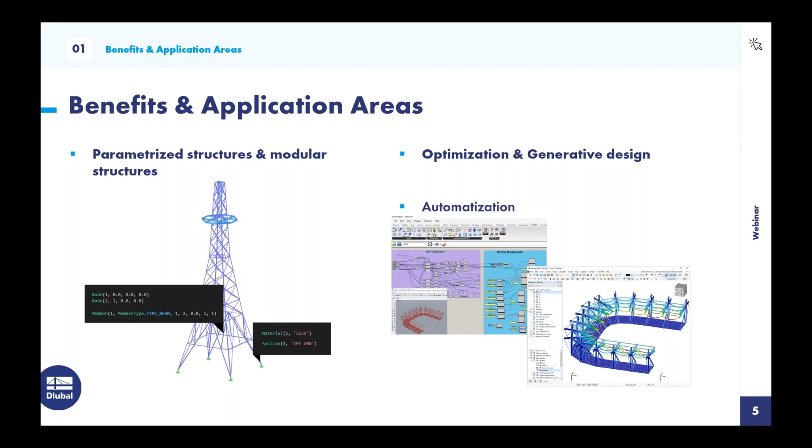The most fun part is the ability to communicate between a wide range of software. Beyond that, one can create their own applications or own plugins on top of RFEM 6. There will be examples showing how to make that happen.

So what is an API? API stands for Application Programming Interface. It is basically a messenger. It takes requests, translates, and returns responses. It is a communication protocol between multiple software or services to interact with each other. To understand the concept better, here is an example. A graphical user interface is the communication protocol between humans and software programs. Most of you are using the RFEM interface and give the program commands with the help of buttons or inputs. Well, in our case, API has the same function between one software and another software.

What are web services? Actually, web services are a form of API, and the distinction lies in style and the way of communication. Web services are XML-based information exchange systems. In our case, we are using an HTTP technology called SOAP, which stands for Simple Object Access Protocol, to make this connection happen. To use this connection in structural analysis and design, frameworks prepared by our team serve very basic functions, which enable the user to give RFEM commands and get responses.

So what's the difference between COM and web services, and why have we changed our technology? Well, RFEM 5 is a native Windows application. It only runs on the Windows operating system. RFEM 6 is platform-independent software which is compiled on Windows, Mac OS, and Linux. COM technology was a Windows feature which runs on Windows only.

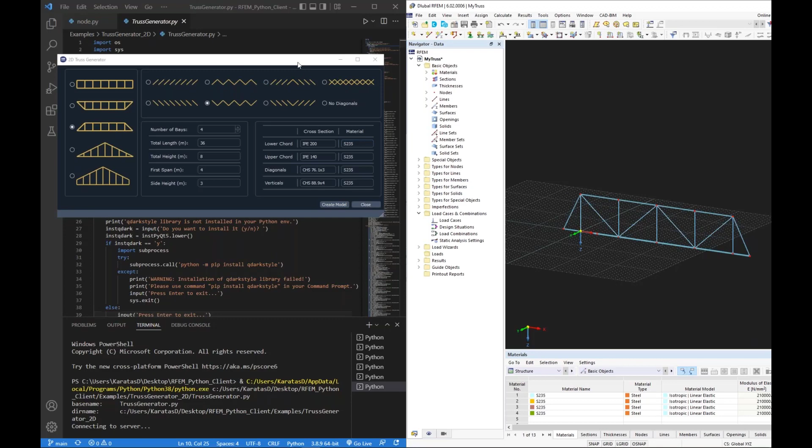I can edit the geometry inputs here. Let's say 8. I'll click Create Model again. And there's a new connection, and the truss is created. Yeah, it's a cool example, I think, and I'm going to show you some other examples. Let me open my new folder. I have prepared some examples for the webinar.

Here I have a tank creator example, which is a console application. It takes 3 inputs for creating a steel tank. These inputs are the diameter of the steel tank, height of the tank wall, and height of the arc. If I run this file, there will be a new model named steel tank, and there will be some inputs in the terminal for the parameters.

Okay, my model is created, steel tank, and my terminal is asking me the diameter of the steel tank. Let's say it's 12. The height of the tank wall, let's say 6. And height of the arc is 2. I'm clicking enter, and objects are updating in RFEM now. And my tank is created.

If you would like to edit this script for your needs, feel free to do that and create your own console applications or own graphical user interface. It's that easy. Okay, now I would like to create an example from scratch, and I will be coding this and explaining every line step by step.

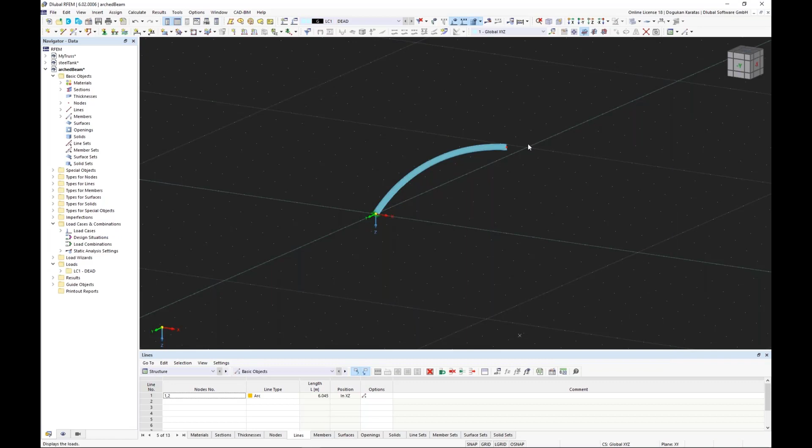Okay, let me make it full screen, and you can see our load case has created, named DEAD. Also, we have the static analysis named linear and self-weight consideration here 001. Okay, and you can see the loading by clicking this. You can see this is projected set. And of course, since we have calculated, the results are already ready. You can click the results and you can see the results here in the model.

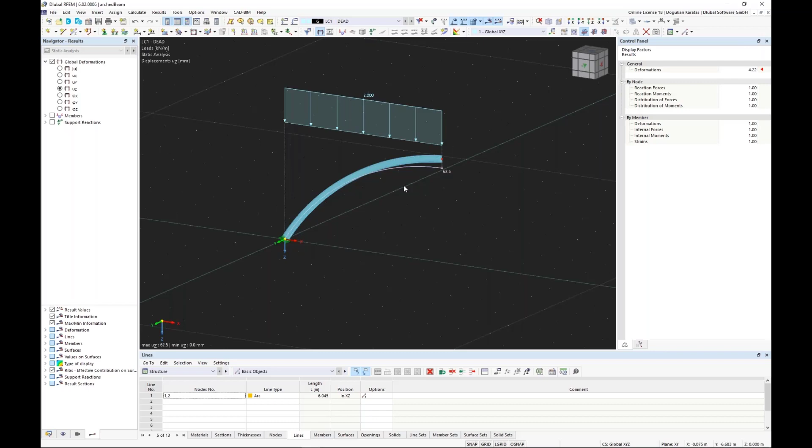Okay, but for the post process, you would like to get the results out. So I would like to show you some examples how to get the results out. So we have some libraries for exporting results named import export. And I would like to export the results, and I'm going to import some classes here. You have some choices here, export the CSV, XML. I would like to show you CSV. Also, I would like to show you the XML file, the result tables here. And additional, we have a report, which is in HTML context. I'm going to import it also. Export result tables to HTML.

Okay, I'm going to export my results. Let's begin with the CSV. I'm opening my brackets, and the only attribute is the path. Okay, I just want to give the same path here. I'm copying my path here, and I'm going to change this name as results CSV. I would like to create some results tables to XML. I'm copying the same path and rename it as results XML.

And finally, I would like to export results to HTML. Okay, I need to give the path again. Results HTML. I have to use the R here. Okay. Okay, let's see what happens. I don't have to look at the RFEM anymore because I'm going to export all the results here. I'm expecting all the results table in this directory. Let's see what happens.

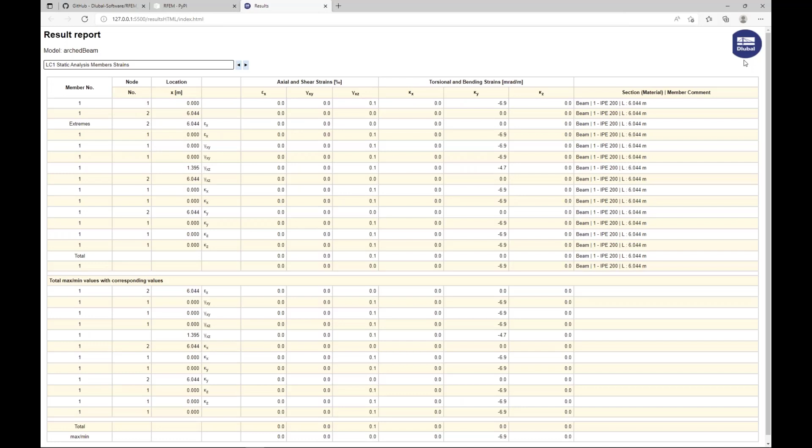And the final one, if you would like to see your results in a table view, you can go to index.html, open with live server. You can see your result report in HTML file. All the reports are ready here. And you can see we have a logo here, or we have a table configuration. You can go here, HTML styles, or in index.html and change your icon, change your workflow. You can modify this HTML creation, whatever you like.

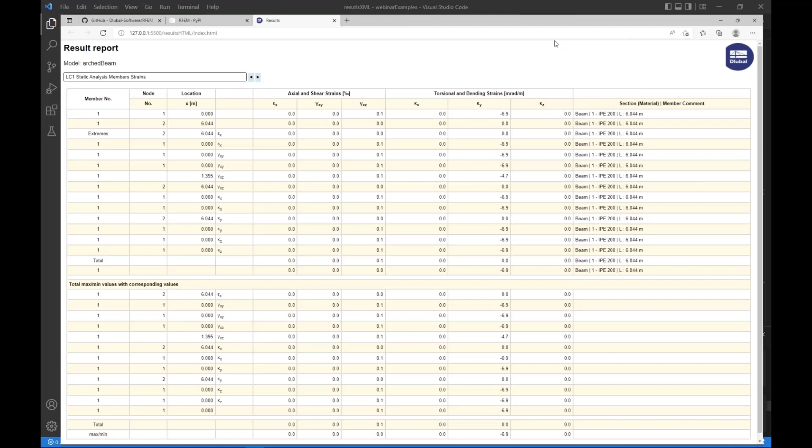I think that's all I can show you. And now I would like to hand over to my colleague Jaroslav for the C# examples.

Okay, thank you, Dogukan. I will show my screen. Okay, so just reshuffle it a bit.

Okay, so I will start with the same entry point as Dogukan did, because what I would like to present, that's publicly available also in our company GitHub. Here I'll be using the code which is stored here in the repository called Dlubal C# client. And here you can download the code in the same way as Dogukan showed you for the presentation related to Python.

What I would like to do is to just show you how it looks if I download it. So I have an example which is called Cantilever, and if you open it in Visual Studio, it looks like this. There is just one CS file which contains all we need. This file is mainly related to the options that we could use, the library for RFEM, or I can use also the library for RSTAB, because there are some differences mainly in the definition of lines or surfaces, as surfaces are not available in the RSTAB application.

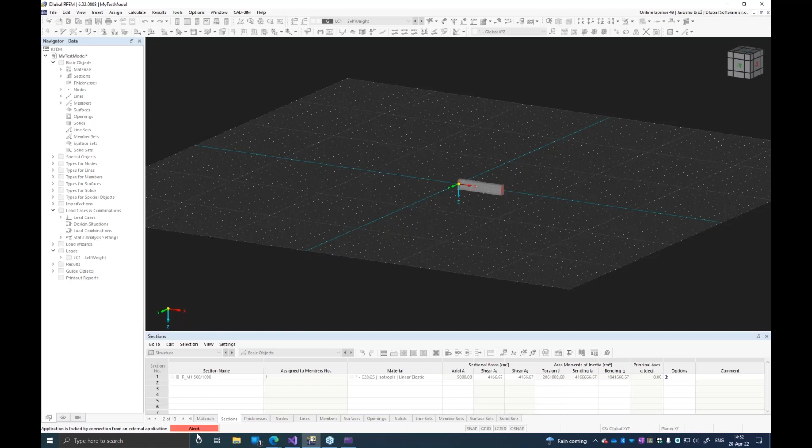It could be useful in the case that you are in the experimenting phase of the development of your application and you need to abort the connection because your application crashed, and you need to work also with RFEM, so you can do it here. So I will break the connection, and here I'll just show that I'm using the self-weight, only the self-weight for

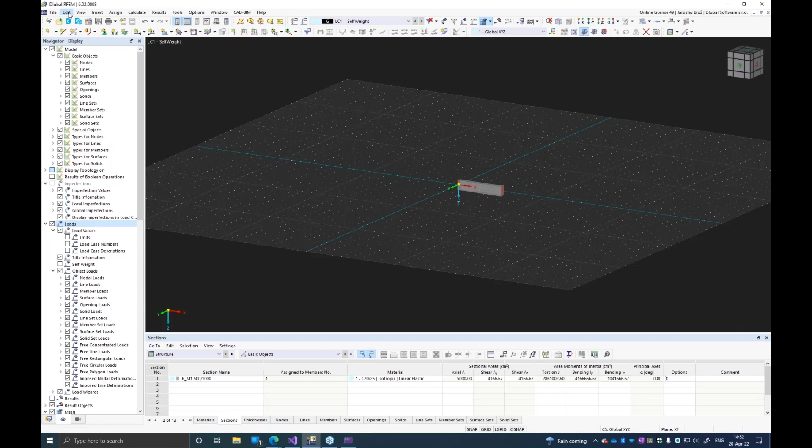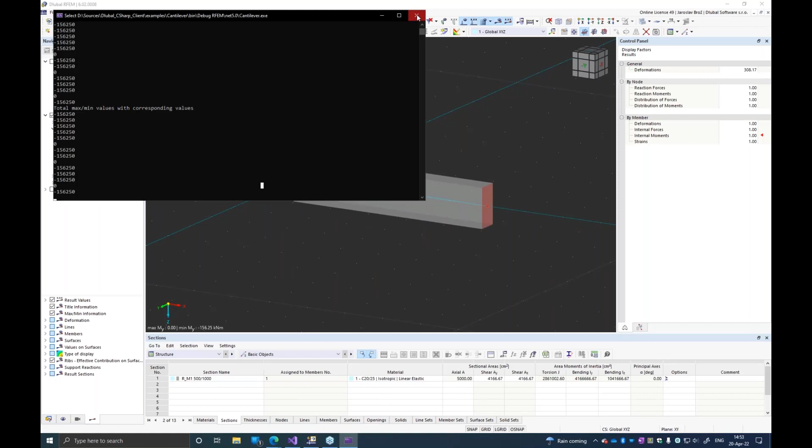the demonstration purpose. And I will also show the results, so you can see here that I have them calculated, and there are some values which have been presented in the SI units, which means newton meters. Here you can see it in kilonewtons. So I will close this and stop this.

So basically, this is what I would like to share with you. I can do also the same as I did for RSTAB, that I will just switch it here into RSTAB. Then it slightly changes the view in the IDE. Now I'm using the DLL, or the library, for RSTAB. I can work with it. What I need to do is to be sure that here I have the right address for it.

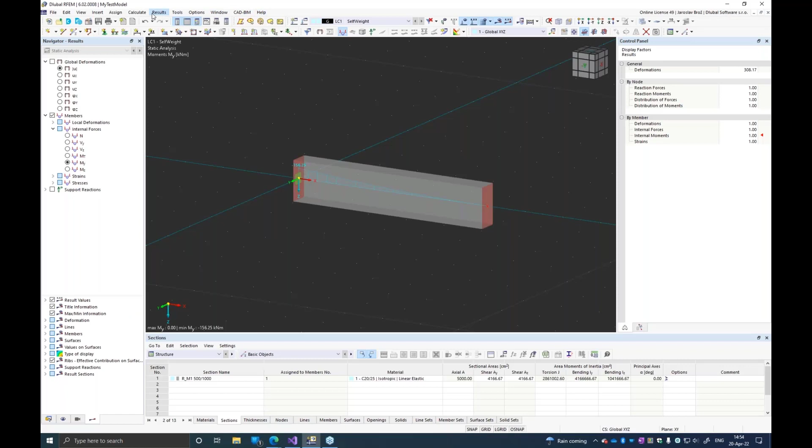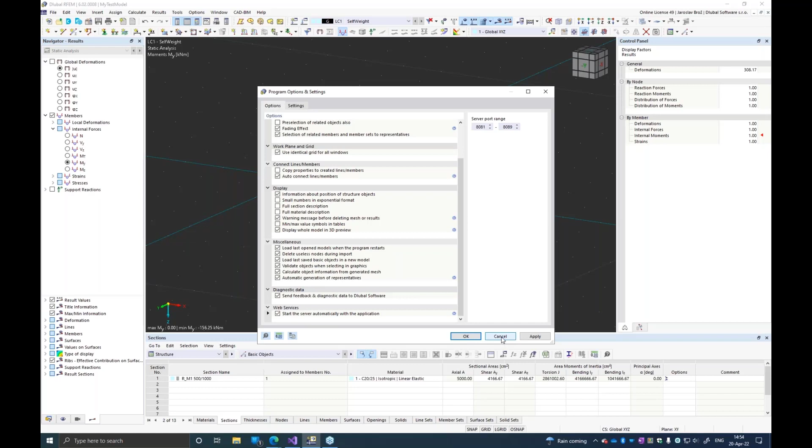I can also open RSTAB and go through the same, in the program options here, to check the server port ranges, because if I would like to use, let's say, simultaneously RFEM and RSTAB, I need to differentiate also the port ranges, because it will be a different URL address. That's what I wanted to demonstrate with such an example here.

Let me briefly check that there should be also the object browser, where I will try to find my library. If I have it here, I'm quite lost. So let's do it differently, through this. Basically, here you can see which options you can use for the application, and the same is also valid

for the model. There is also one option which could be presented, because if I have a running application, I can just type into the URL address box localhost:8081/wsdl, and I can see the description of the requests and responses which are done in the background. I can use also some extensions like Wizdler, and here you can see what methods you can use for the application.